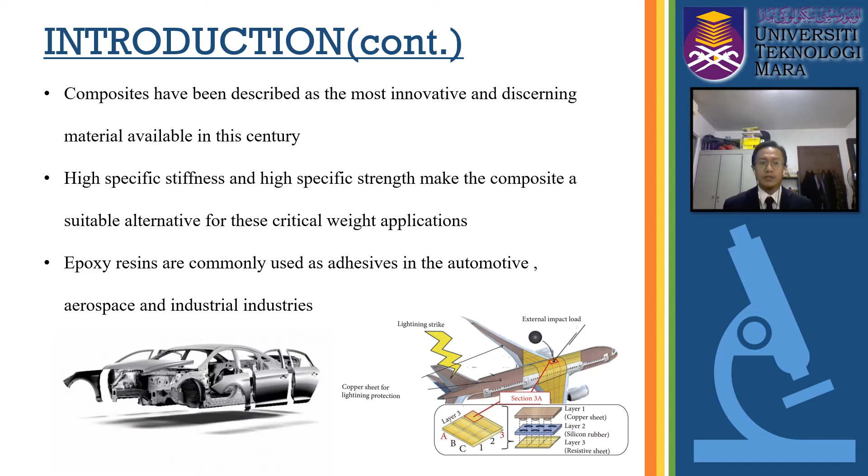Epoxy composite also has its own advantages and disadvantages. The first advantage is that the product weight can be reduced, because the composite is lighter than other materials such as aluminum. The second is a stronger structure; for example, fiber reinforced matrix systems are stronger than traditional aluminum found in most industries, and they also provide a smooth surface for the product.

The fourth advantage is that epoxy composite does not corrode easily compared to other types of structures. Epoxy composite also requires less maintenance and repair costs compared to other materials. As for disadvantages, epoxy composite does not break easily, which makes it hard to tell if the interior structure has been damaged. This is the single most concerning disadvantage of using composite material. In contrast, because aluminum bends easily, it is quite easy to detect structural damage. Additional repairs can be more difficult when a composite surface is damaged, which ultimately becomes costly.

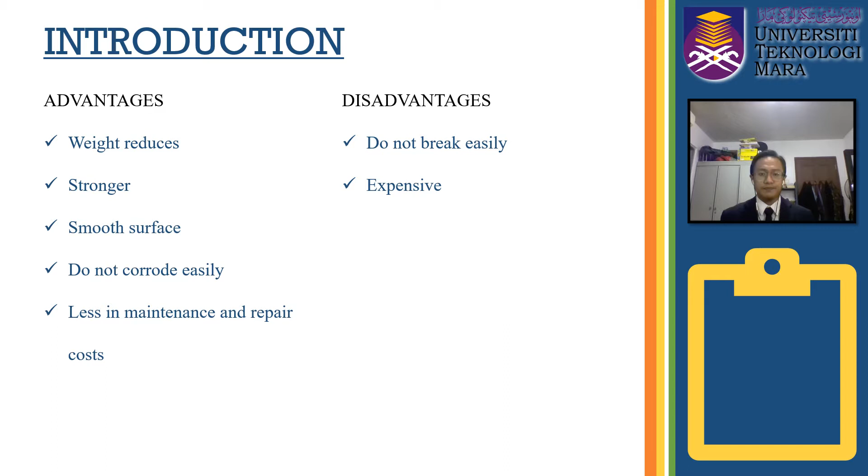For the problem statement, it is generally reported that mechanical properties of composite materials are influenced by material aging, which is often accompanied by moisture absorption. This can cause delamination and invisible harm. For example, when an object unluckily drops on the composite material, it may not cause visible damage but can still change the performance of the composite material.

The second issue is that composite material is readily exposed to damp environments. The absorption of water in the composite will have an effect on the mechanical properties of the composite and will also reduce its performance.

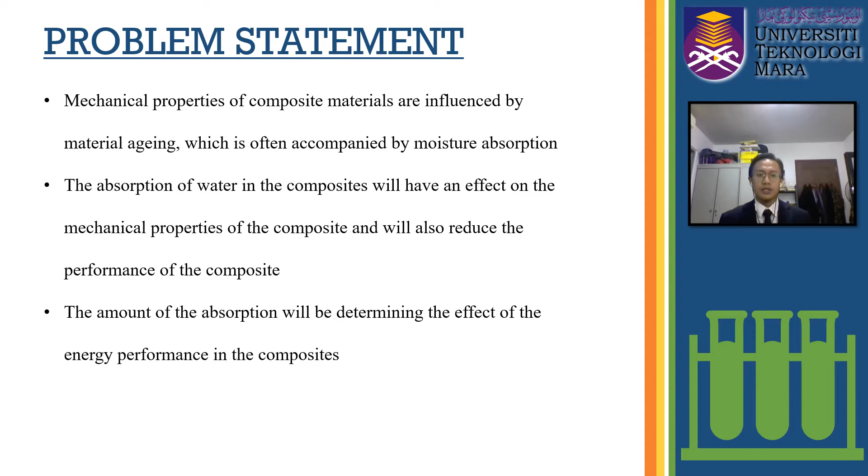The third issue is that the composite will be soaked in distilled water for different periods of time, and the amount of liquid absorption will be evaluated. The amount of absorption will determine the effect on the energy performance of the composite. We need to know whether the energy performance of the composite will be high or low.

There are three objectives carried out in this project. The first is to fabricate composite with moisture content subjected to 1 day, 7 days, and 14 days of submersion. The second is to determine the shear strength of glass composite using the interlaminar shear strength test, or ILSS test. The third is to determine the flexural strength of the epoxy composite using a flexural test.

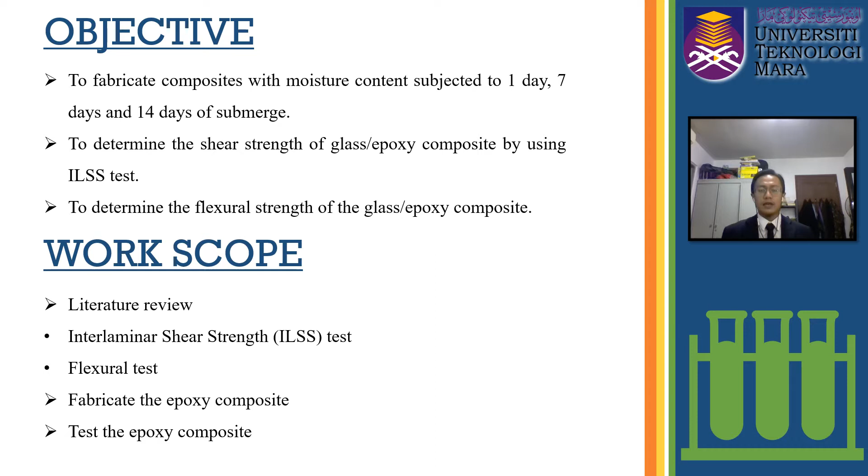For the work scope, the first thing I do is literature review, where I will talk in detail about the interlaminar shear strength test, or ILSS test, and the flexural test. The second is to fabricate the epoxy composite using epoxy, hardener, and fiberglass. The third is to test the epoxy composite using the ILSS test and flexural test.

In this literature review, there are five things I will present: composite material, epoxy, influence of moisture content on composite, interlaminar shear strength, and flexural properties.

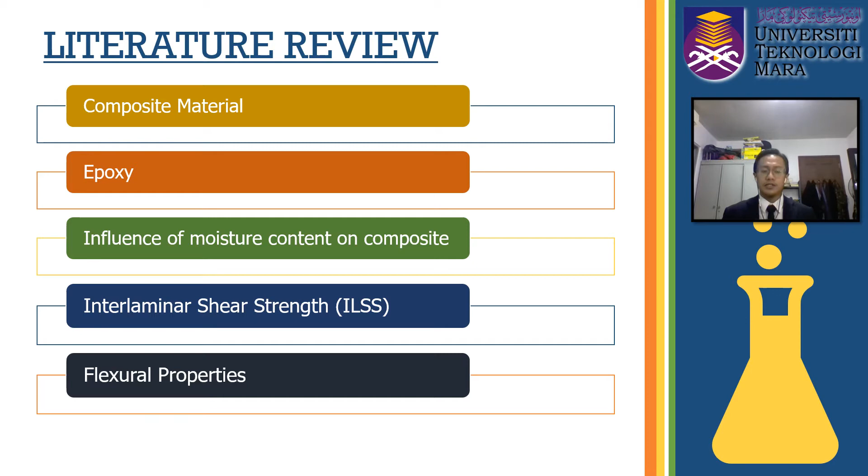The first is composite material. What is composite material? It is the formation of two or more constituent materials with significantly different physical or chemical properties, which when combined produce a material with different characteristics compared to the basic elements.

Composite materials are widely used for bridges, houses, and structures such as ship hulls, race car frames, toilets, storage tanks, marble sinks, and countertops. The greatest disadvantage of composite material for manufacturers of components and aircraft is their higher initial cost compared to metals.

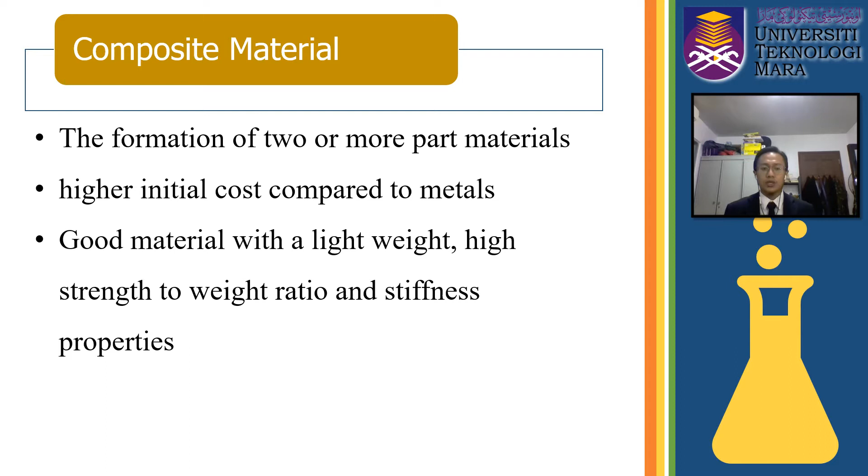The higher cost is mainly due to the quality of the fiber and the complex process needed to produce the finished materials. This third material is good, with lightweight, high strength-to-weight ratio, and stiffness properties.

The second one is an epoxy. What is epoxy? Epoxy is the main material for coating, adhesive, corrosion protectors, and electronic encapsulation. Epoxy-based coating in automotive applications prevents rust and corrosion on vehicles and metal components.

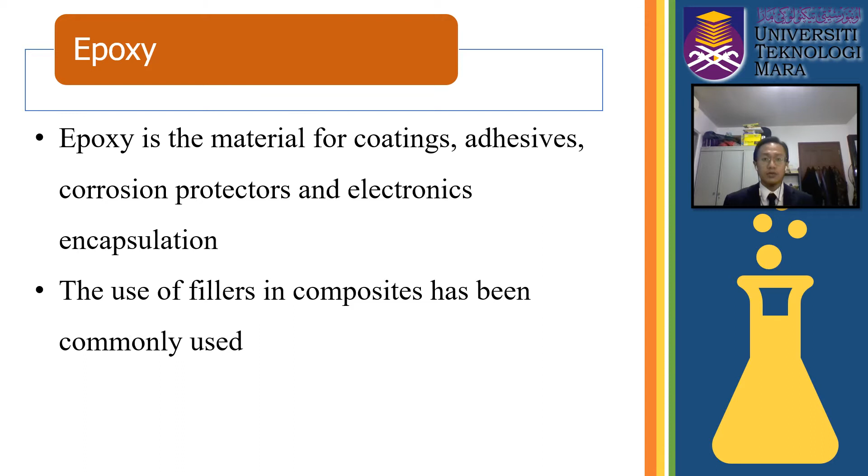The use of filler in composites has been commonly used as certain forms of fillers improve composite properties. Compared to inorganic fillers such as carbon black and titanium dioxide, natural fillers have the advantage of lower weight and lower price.

Composite materials are exposed to moist and wet environments. It is important to study the effect of moisture on composite material. Moisture absorption test is a suitable test to investigate the effect of moisture on the composite.

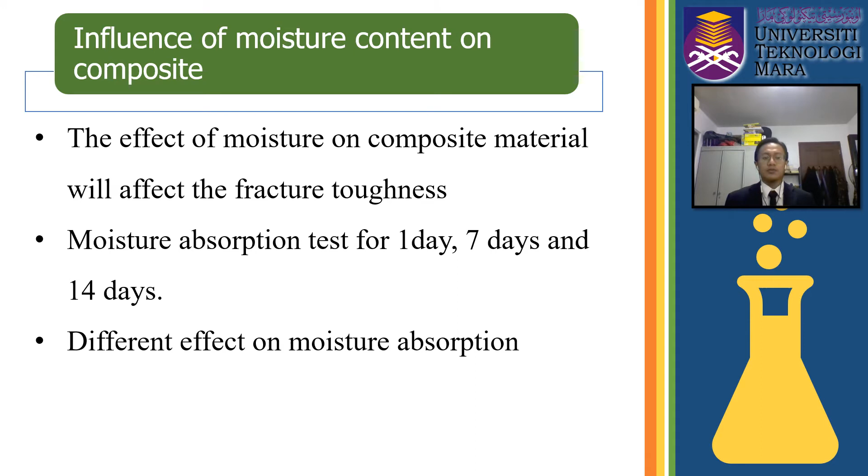In this project, the specimen was submerged into distilled water at room temperature for 1 day, 7 days, and 14 days. The effect of the composite with different moisture content can characterize the interlaminar fracture toughness as the ratio and moisture content level. The aspect that can be known is that the same type of composite will have a different effect on moisture absorption.

What is interlaminar shear strength for? It is to determine the interlaminar shear strength between two laminates in a composite. The interlaminar shear strength plays an important role in the failure strength of composite laminate. The interface can be sheared apart in the corresponding direction.

When the transverse shear load experienced by the composite exceeds the interlaminar shear strength, a delamination failure occurs between the layers of the reinforcement fibers.

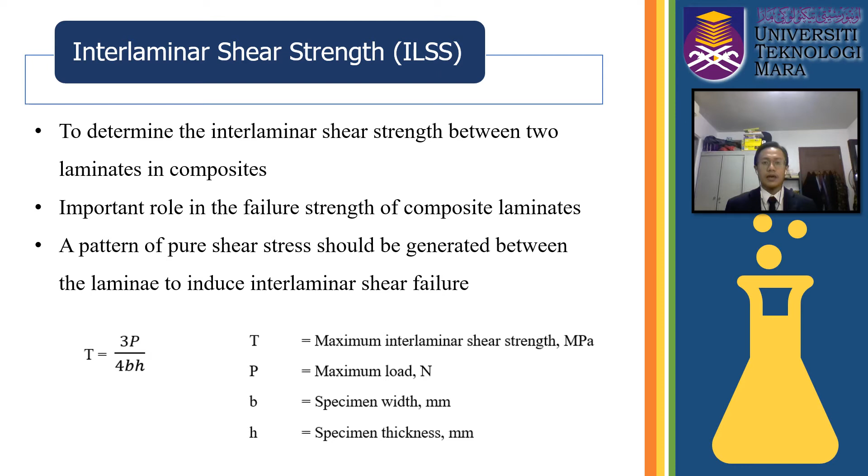In order to measure ILSS of the composite directly, a pattern of pure shear stress should be generated between the laminate to induce interlaminar shear failure. These are the formulas that we can use to find the ILSS of the material.

What is flexural properties? Flexural tests are generally used to determine the flexural modulus or flexural strength of a material. A flexural test is more affordable than a tensile test, and test results are slightly different. The material is laid horizontally over two points of contact, and then a force is applied to the top of the material.

If a failure involves compressive stress, microbuckling, or shear splitting, the failure stress is lower. The most common aim of the flexure test is to assess flexural strength and flexural modulus. Flexural modulus is determined from the stress slope versus the strain deflection curve.

These two values can be used to test the ability of the sample material to withstand flexure or bending force. These are the flexural strength and flexural modulus formulas.

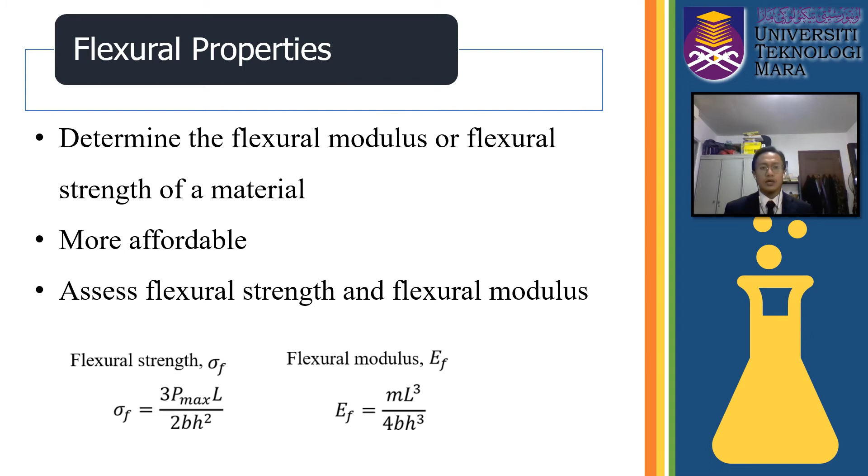These are the methodology that I used while doing this project. The first thing I do is a literature review. I will find and research about the whole project, what the project is about, what I need to do, and what I need to have.

The second thing is I can edit from the literature review, I can identify the objective, problem statement, and scope of the project. After I know the problem statement and objective of the project, then I can prepare the specimen that I need to do.

After I finish my specimen preparation, then I can test the specimen using the ILSS test and flexural test. After I do the test, then I can collect the data and do some analysis for this project.

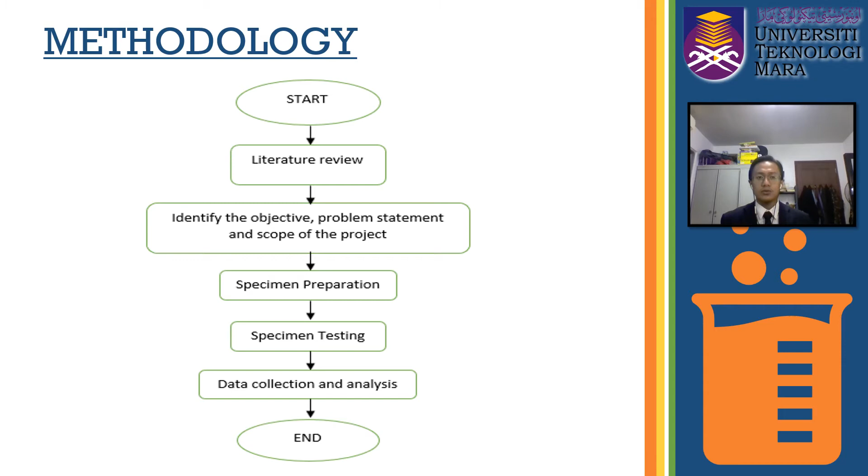For the specimen preparation, the first thing I do is make a mold with measurements of 180 mm length, 140 mm width, and 4 mm thickness.

After making a mold, I mix epoxy and hardener with a scale of 3 epoxy to 1 hardener, in a mass of 90 grams of epoxy and 30 grams of hardener.

After I mix them and stir well to ensure there is no bubble in my mixture, I pour them into my mold and put fiberglass with the mixed epoxy. I put 6 layers of fiberglass in the mold.

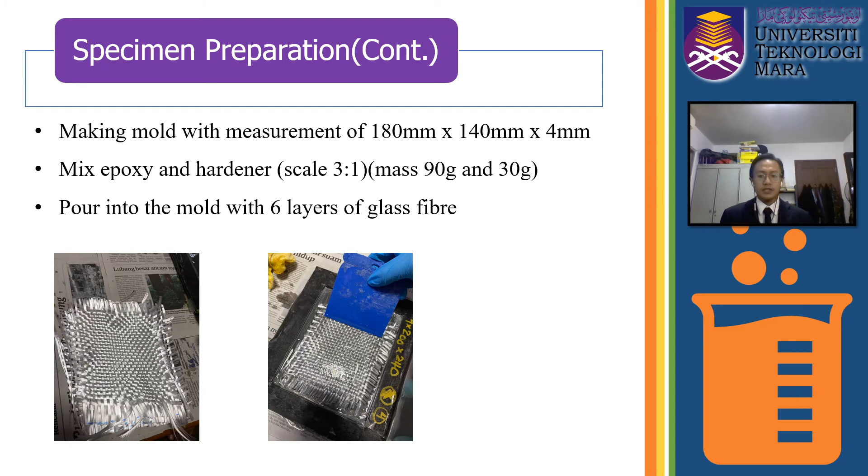Next, I put OHP paper on top of my mixture to ensure that I can compress it until it becomes 4 mm thick in the specimen.

After I put the OHP paper - why do I put OHP paper? It is because OHP paper is one of the materials that will not stick to the epoxy composite when it dries. After putting the OHP paper, I will dry the specimen for 1 day to ensure the specimen is totally dry.

After 1 day of drying the specimen, I take out the dry specimen from my mold as shown in the picture.

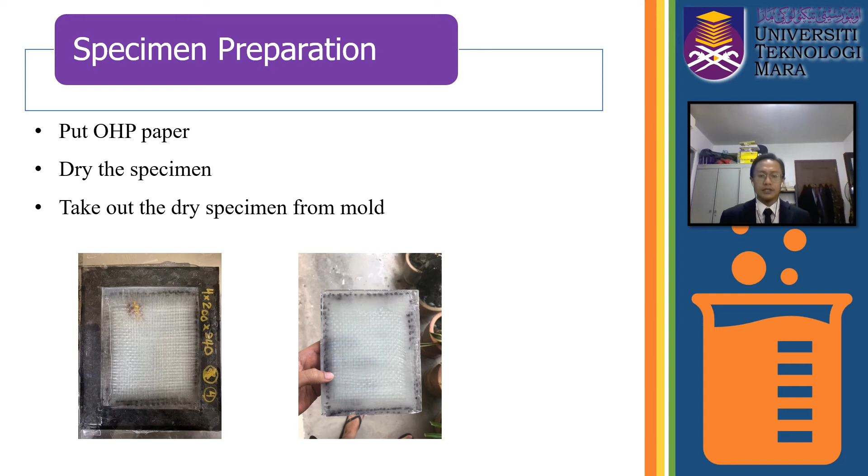For the specimen testing, I used two tests: flexural test and ILSS test. For the flexural test, I will cut the specimen made from my previous mold into the size of 12.7 mm times 80 mm times 4 mm.

The support span length is 60 mm, the loading span size is 10 mm, and the speed rate that I use is 1 mm per minute.

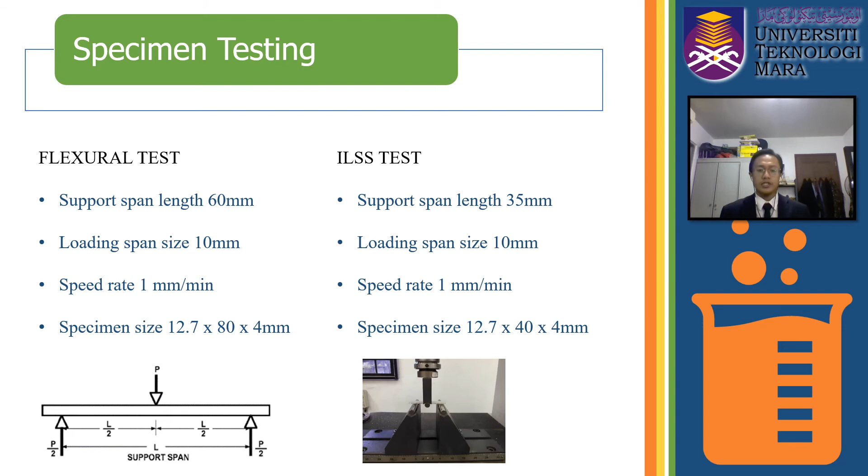For the ILSS test, the specimen size is slightly different from the flexural test, which is 12.7 mm times 40 mm times 4 mm. The support span length of 35 mm is quite shorter than the flexural test, and the loading span is the same as the flexural test, which is 10 mm, and also the speed is the same as the flexural test, which is 1 mm per minute. 4 specimens were prepared for testing using the flexural machine.

The specimens that were tested were submerged in distilled water within 0 day, 1 day, 7 days, and 14 days. This test was conducted to know the capability and strength of each specimen and determine which one has good product performance when submerged for a certain time.

Flexural modulus measures the resistance to deformation of the material when external forces are applied, where stiffer materials show a higher value of Young's modulus. Flexural modulus was determined by taking the initial slope of the stress-strain curve in the elastic region.

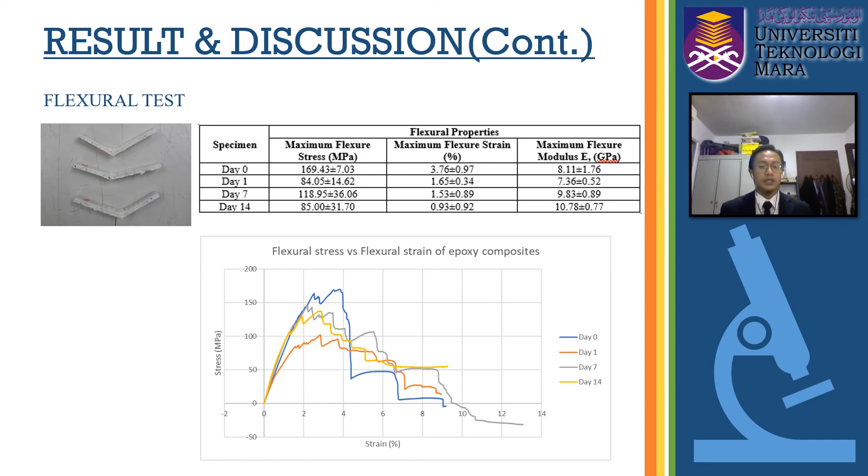From this test, it is relevant and can be accepted that 1 day of submerge has the lowest flexural modulus because it has lower absorption of distilled water compared to 7 days and 14 days.

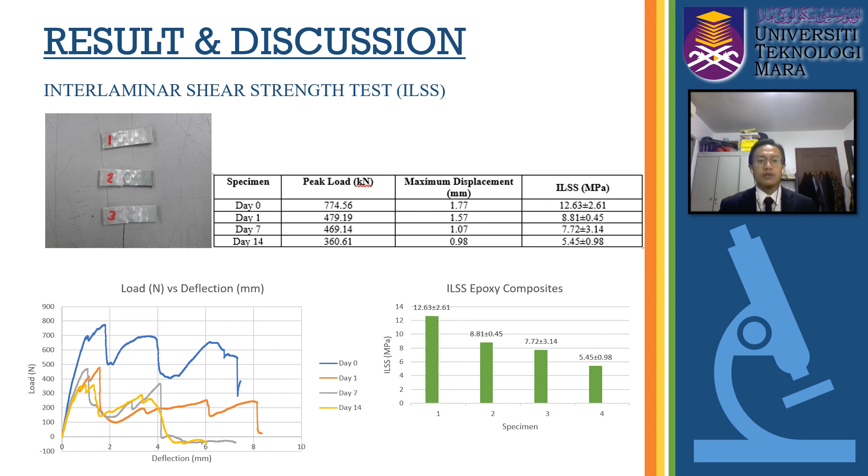From the result, it can clearly be seen that specimen 1, which was not submerged into distilled water, has a high ILSS value of 12.63 megapascal, while specimen 4, which had the longest time period submerged in distilled water at 14 days, has the lowest ILSS value among the specimens, which is 5.45 megapascal. In this project, we can conclude that the project was successfully achieved.

It's because we have successfully fabricated and tested using mechanical tests, which are ILSS and flexural tests. Second, the composite properties can be affected by mechanical behavior, where we can see that the composite material will be affected by water submersion.

The third point is that epoxy composite not submerged in water has high performance, which we can see in this project: among all days submerged, the 0 days submerged specimen has higher performance than others. This has high potential in the engineering industry when using this experiment.

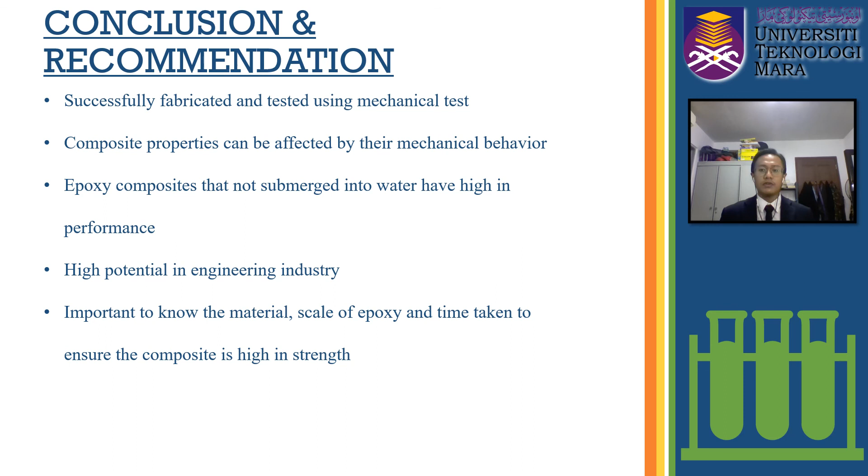In my experience making this specimen, it is important to know the material scale of the epoxy and the time taken to ensure the composite is totally high in strength in order to achieve the quality of the composite. This is the reason why I was really detailed in this study. It is to ensure that we obtain better results for industries, where we found quality material and the proper way to make a specimen.